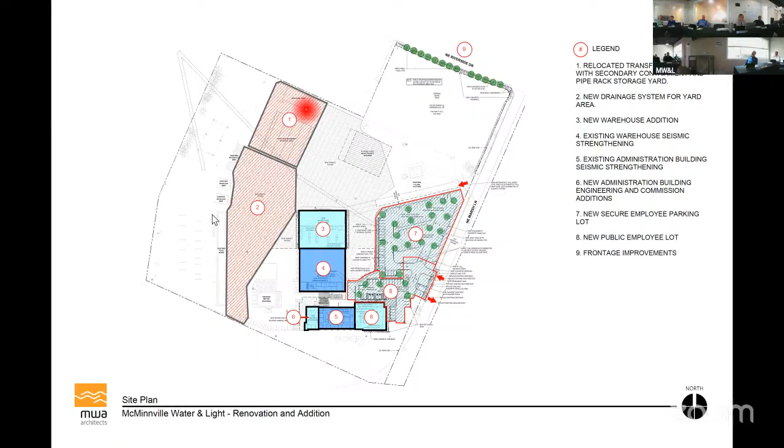And then last but not least, we are also doing new frontage improvements along Riverside Drive, which will consist mainly of a sidewalk, street trees, and just the general continuation of the normal public requirements for the city.

This is a little bit more blown up here. I won't spend too much time on it, but again, the main secure public employee parking lot is in this area, with the new public lot up adjacent to the building.

We're incorporating a better flow through for the mail drop. We have a more prominent main flag, and signage is being improved. The control access for the secure employee lot is much improved, as well as stall spacing and general circulation. The ability for overflow parking from an event to happen there is also considered in the plan.

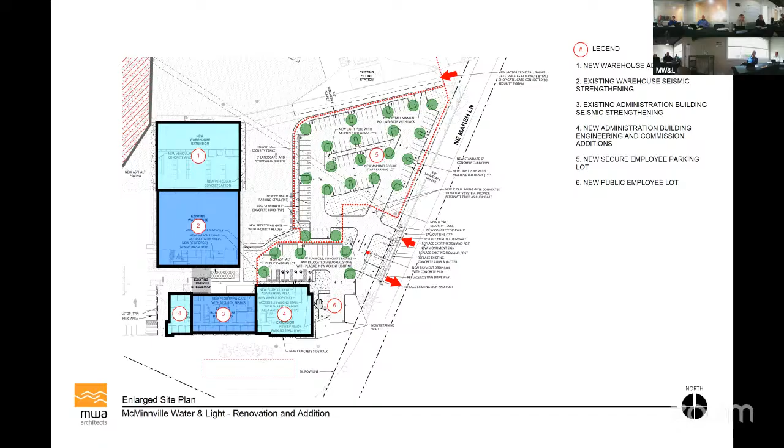I went into a little bit of detail with the warehouse and administration building as well, and we'll get a little bit more into that in the next couple slides. This is the warehouse building — as far as square footage goes, it's almost a doubling of the existing building.

Again, the new addition is broken up into a higher bay structure with a bridge crane to help with unloading and loading of larger materials, and the ability for delivery trucks to drive right through. This will help not only with loading and unloading heavy spools of wire or other heavy materials onto the actual crew trucks, but also taking them off delivery trucks as well. There are new loading docks here, with a new depressed loading bay to the north as well.

The new addition is going to be primarily moving a lot of the rack storage that was put here due to supply chain issues during COVID, now finding a permanent home for them in the new addition. The original use of the warehouse will then be returned back to more vehicle storage, vehicle maintenance, and prep in that area. So this building that was doing double duty and sometimes getting a little bit tight will now see a new way to better house the inventory in the new addition, and then return this back to the original use.

The building itself for the new addition is going to be an MPP panel, mass plywood panel. It'll be clad in a formed metal panel skin with a metal roof that will be a continuation of the existing roof, and the metal panel will provide a look very similar to the existing building as well.

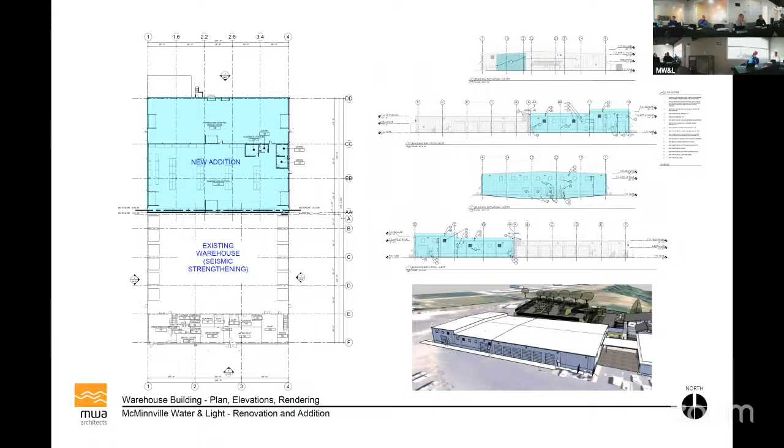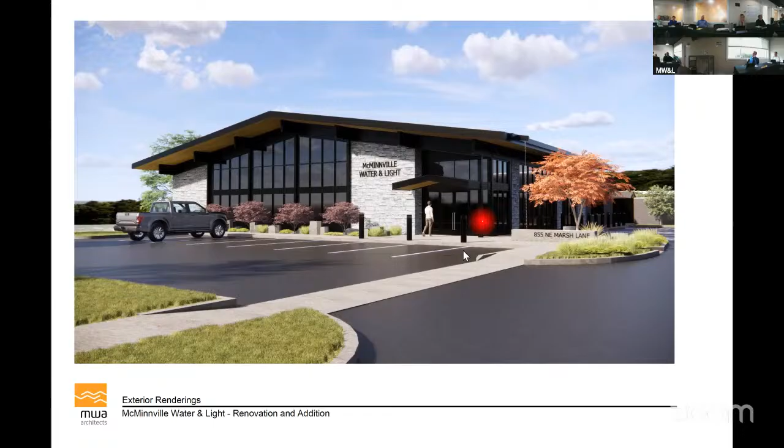Back behind her is the commission room area, with informal plantings out in front that mimic a little stream with some basalt columns for sitting, but also helping provide protection to the building. Over on this side is where most of the accessible parking happens, and we have a nice two-story window storefront along this side to allow a lot of nice northern light in. As you enter, this filters through to show the display area, and at the end, the customer service area.

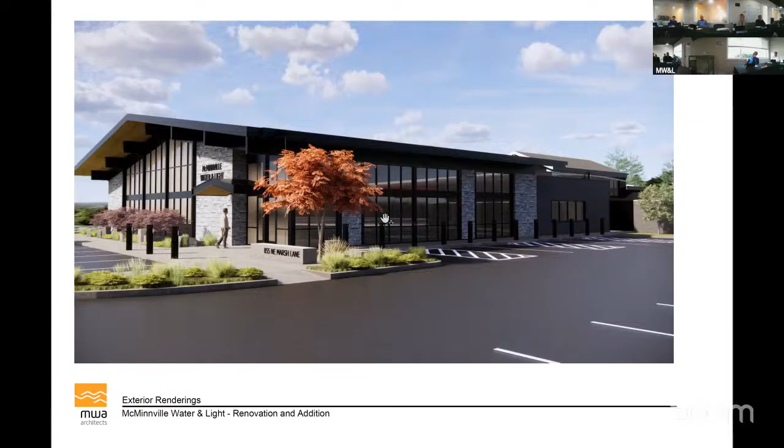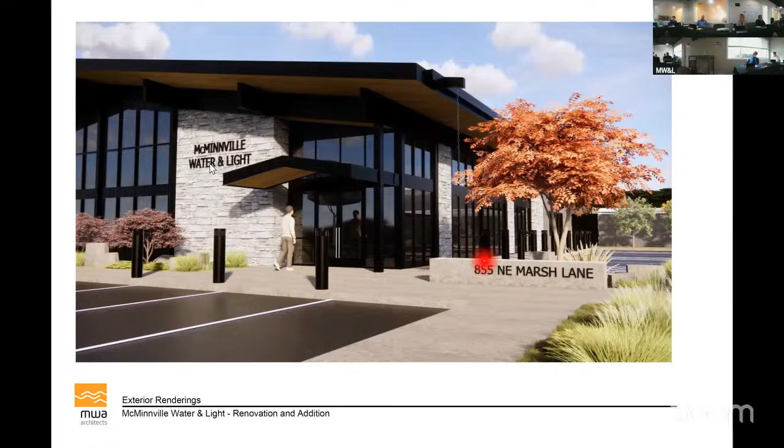This is a little bit more rotated view as we come around the side. Again we're seeing mainly the customer service history hallway with the commission room right behind it. A little bit closer look at the main entry, the drop canopy, and the main entry doors, with the addressing and building name on the side. These are a couple of views as we come around the end of the building.

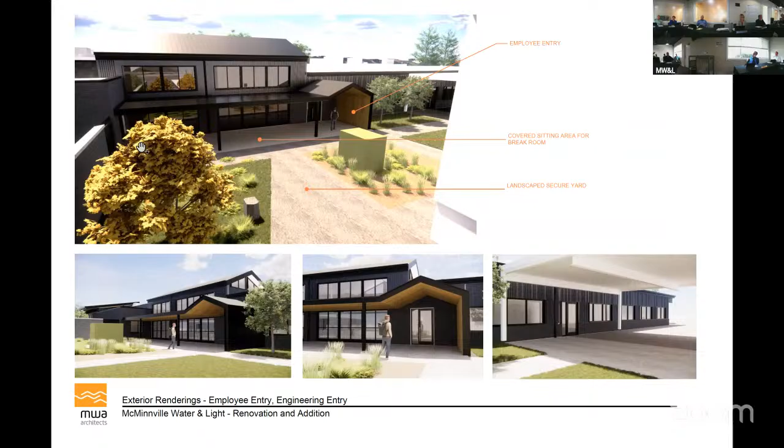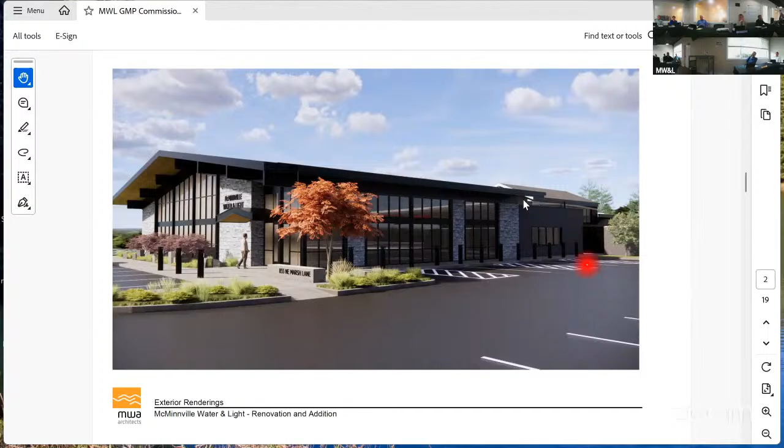So we have sort of a... this is the customer service area. We have a private garden wall here that separates the public areas from the private areas. We're going to jump on the other side of the wall here and take a look at the employee entrance. This is the wall that happens over here.

We've tried to reconfigure this area. Again, this is that two-story space I was talking about earlier with the break room. We have a covered break room area, so in nice weather people can sit outside and have their lunch or just a brief break outside. The walkway comes from the secure parking lot, and we've done a shaped gable structure here to signify the entry into the building.

The aesthetic of the building changes from being more of a brick veneer to a metal panel with a brick wainscoting. The wainscoting provides durability down at the people level, and the metal panel has a varying pattern to provide interest and break up some of the larger runs of the building. This is the canopy that ties the existing canopy to the administration building and the warehouse.

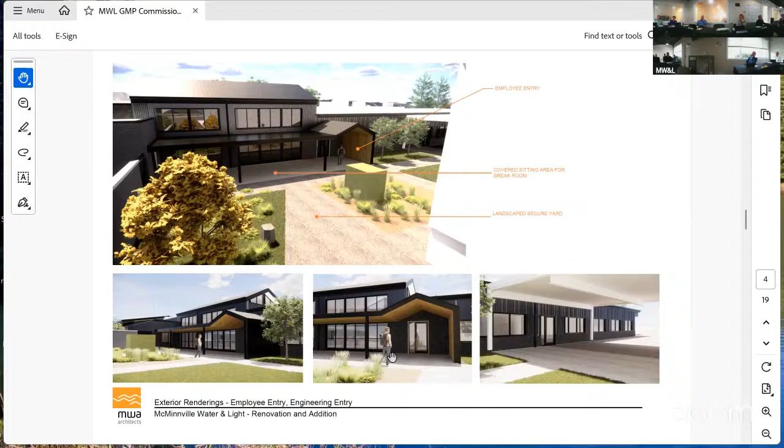At this point, this is the employee entrance right here. Let me get that back to full screen. Oh, thanks, sorry about that.

This is the western addition with the warehouse. So again, it's basically taking the existing structure and adding onto it to keep the same sort of height. The nice thing is we're also using the MPP panels, the mass plywood panels, on this structure as well. The mass plywood panels worked really great with the warehouse because it allows you to bring the panels on site, erect them really quickly, and then weatherproof them in and then do the final cladding on it, be it roofing or siding.

We also have large areas where we're getting these larger spans, and the ability to then use the underside of the MPP panel as a finish for those rooms is another attractive feature, because it's basically doing double duty, not only as the structure but also as the finish on the other side. In the engineering addition, we're using those panels as the roof system there, as well as over the commission room and sort of a larger gable, supporting it with these larger glulam beams that go through it. So we're trying to get as much efficiency out of the materials, as well as use them aesthetically and kind of create the language of the building.

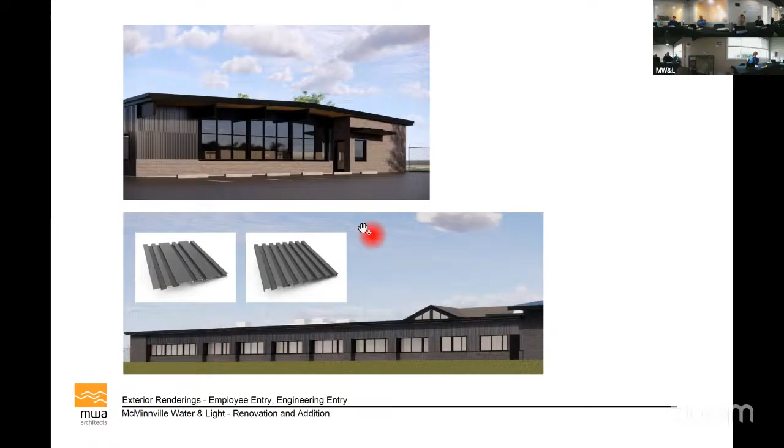So over here, we're seeing a 1.5 story space, with workstations behind here. We'll see a future rendering later on. Again, to bring in as much light as possible deeper into the building, since this is one of the deeper spaces, we're using brick wainscoting on the lower portion and metal paneling in a couple different patterns to provide interest along the south face.

Talk briefly about the plan here. This goes into a little bit more detail of the commission room, in the formal commission room layout. We have an underfloor system so we can look at providing power or data in a couple other configurations, either all staff meetings or training meetings.

Again, we have shades to work with the large glass walls, so we can control light for different presentations. The deliberation room is immediately off of the commission dais, the storage room for helping store all the different furniture in the room, and then a support pantry for refreshments.

The main entry here is off the front of the building. Again, we'll see some of the renderings here of the entry display area with the customer service at the end of it.

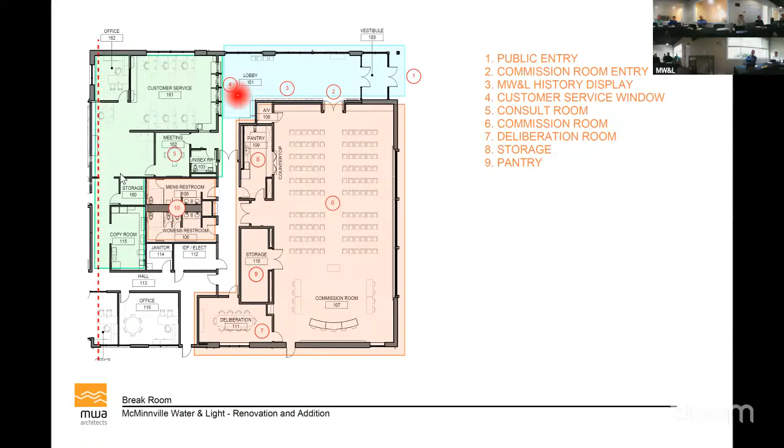This is the view, this is the main entry. We basically pulled off the exterior system here, so you can get an idea of a printed wall covering that will show sort of the forest that's part of McMinnville Water and Light's watershed.

This is the main entry to the commission room, with a decorative light fixture calling to mind the idea of water and rain, since most of the power is generated from the Bonneville Dam, which is water and rain supported. The display here mimics the idea of water and a river, showing the progression of McMinnville Water and Light from its early times back in the late 1880s all the way up to today.

As you enter into the main space here, the commission room is off to your left with the entry there, and the display here. You can easily see the customer service windows down at the end. People in customer service will be able to easily monitor people coming and going, so they can see if anyone needs help, very recognizable for servicing.

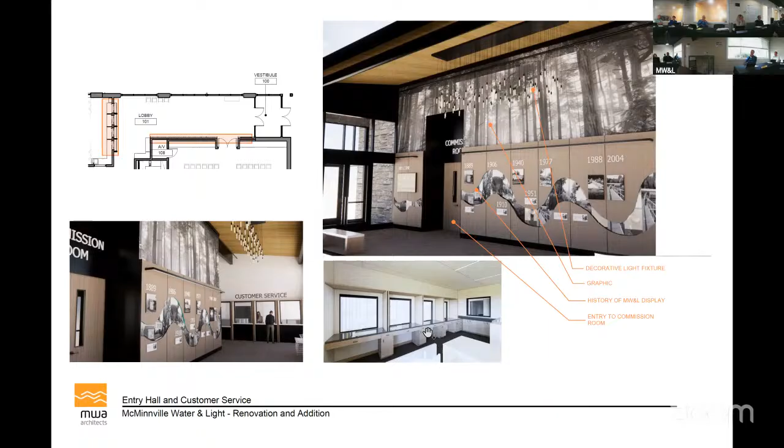This is the interior view on the opposite side, showing what the staff will see. They have 4 different booths for helping people out, as well as a private meeting area.

Here's a quick render of the commission room, looking at the main dais again, with a large projection screen in the back and a decorative back panel on the dais. What we're seeing down here in gray is a patterned acoustic felt to help manage the acoustics of the room. You can see the large glulam beams and the underside of the MPP system there.

This is the opposite view, again replicating the large mural wall covering of the forest in the background. The concept is to show the history of the commissioners or the GMs of McMinnville Water and Light, using this wall on both sides as a historic memorial to McMinnville Water and Light and the people who served it.

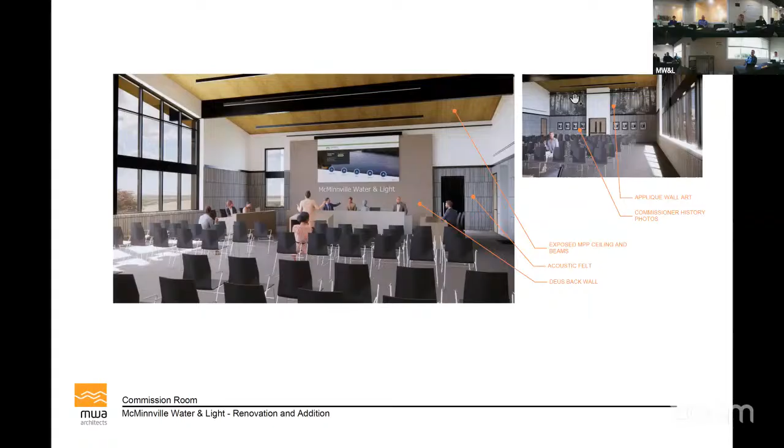This is the break room. It's composed of basically 3 areas from our programming: an outdoor area in green, a large communal service area in blue, and a more private area for individuals to sit or have one-on-one meetings in orange. What we're seeing here is the large communal 2-story space.

We have the service wall at the back of it, recycling, and a TV monitor for announcements and general McMinnville Water and Light information. There's a variety of seating opportunities here, and behind it a drop ceiling that's sort of a transparent grid—you can see it up in this image at the top—that brings the scale down to a more private, intimate level.

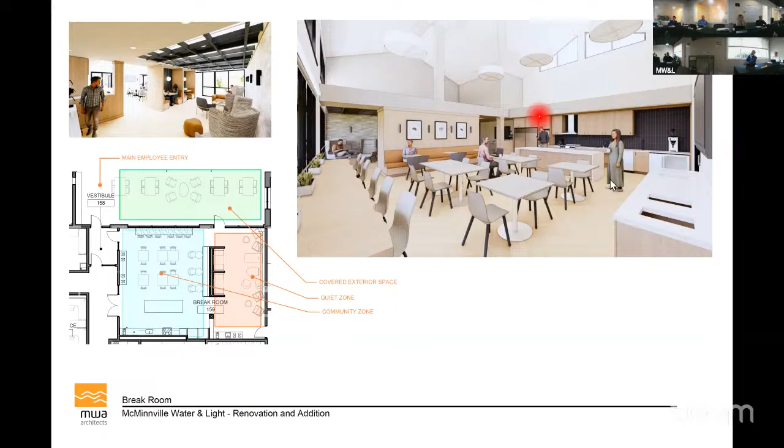2-person booths over here, 1 and 2, up to 4-person seating arrangements, more softer seating, more lounge-like. People wanting a more private break can go here, while larger community gatherings or general break room items happen here. Coffee service, dishwasher, flatware, and everything else that helps with serving meals is down at that wall.

And then lastly, this is the engineering wing. Again, we have the private offices that flank either end. This looks out to the west with large windows looking into the yard area. The engineering workstations are here, trying to bring as much light deep into the room as possible.

Support spaces over here in the green. And then the entry over here with the boot wash just outside, and the locker room for wet weather gear, personal items, and a drying area.

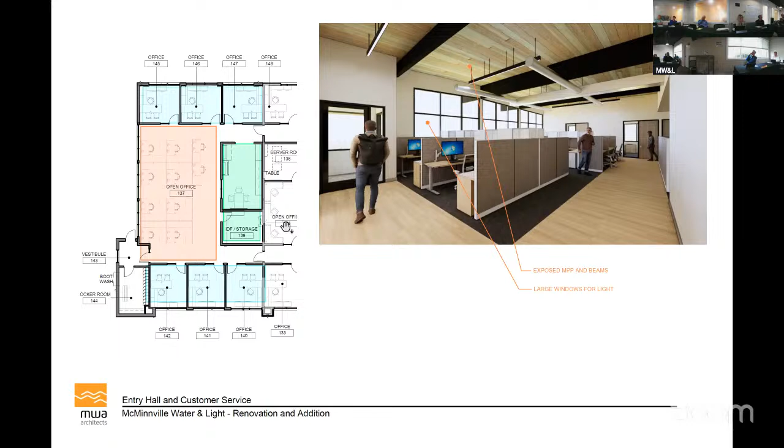These are just a couple of the other areas in the building, but you can see from the images the palette is relatively simple but refined, using traditional Pacific Northwest items like dark metal frames and the expression of wood as a feature material, with simple neutral colors for the walls and ceilings, and the ground plane defined by carpet, LVT, wood-style, or polished concrete flooring.

This is a look at one of the typical offices, with the introduction of a larger 30-inch side light so the spaces can bring light deep into it. We're seeing the conference room in the back right there. Here's a view down one of the hallways with offices on the left, areas where we're bringing a lot of light deeper into the building, as well as opportunities for gallery spaces to show some of the history and artifacts of McMinnville Water and Light.

And so that's just a quick tour through the design development package, and also some of the imagery we've developed producing drawings for PNC's estimation. So, thank you. I guess next I'll bring Jeremiah.